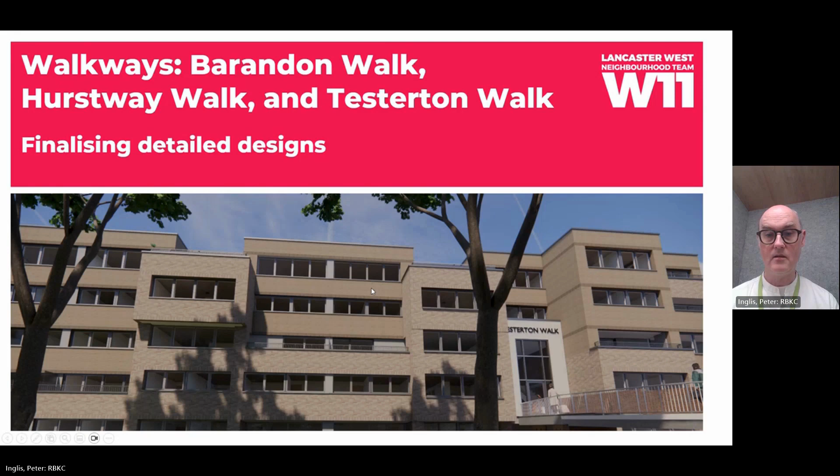So our presentation today, we're going to go through some introductions for the team, have a little recap of where we are on the timeline and on resident preferences and choices, and then our design team will take you through their finalised detailed designs. We'll talk about the next steps and the options we're asking for your feedback and choices on, and some of those choices will be individual choices for your particular flat. So it's really important that you give us these choices so that we can give you your first choice where that's possible.

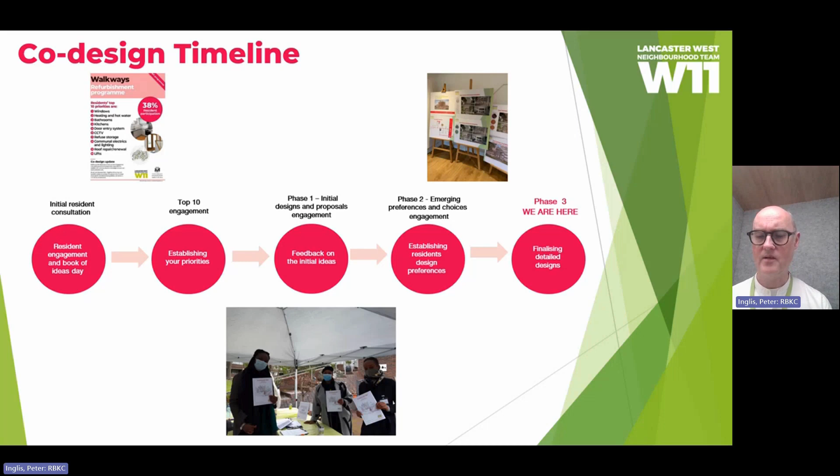So there's been a big gap between there and where we are now. But what we're doing now is building on all that advice that you gave us at that point and showing you the finalised detailed designs, where we're really getting into the detail now and seeking your expertise of living in the block to help us finalise some of those. That's really important to us to hear about.

So just to go through some of the big picture preferences that residents voted on last time out.

What was very important was that you voted for triple glazed windows. The majority of people chose triple glazed windows in the Ideal Combi Futura Plus range, which a lot of you will have seen within the pilot flats, and chose a top hung outward opening way of operating these windows, so that your blinds and curtains are not affected by opening the windows.

Vast majority voted for Ideal Combi sliding doors to the patios, so we have incorporated both of these where size allows us to do that. And looking at the finished colours, there were various colour palettes presented where you chose a white, grey and cream colour palette, which you'll see developed in the slides here. And 67% voted for maximising the external wall insulation, which is really important for reducing energy bills and also keeping you comfortable throughout the year.

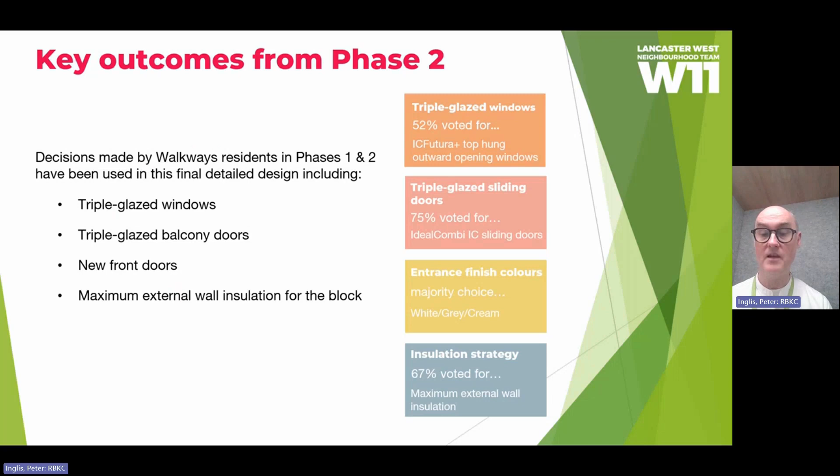That's the sliding balcony doors and the arrangement where, in flats that allow it, two windows slide to make a large opening. That's what we're offering, but from resident feedback, some people felt that arrangement didn't work for them. So we're offering an option on exactly how these windows open, which Mark will talk about in a few slides' time.

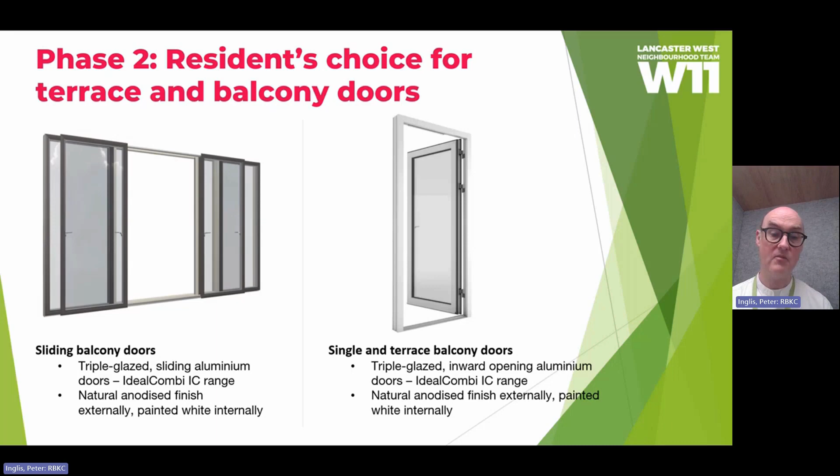Where we can't fit sliding doors, such as at the end of some balconies where there's either a single opening door or a very narrow door and panel, the doors will be inward opening, again triple glazed windows in the same range and colour.

This was a slide from phase 2, where we were looking at different ways of putting insulation onto the building. As you'll see in a minute, we've developed that strategy somewhat, but this was looking at colour palettes - white, cream and grey block facade - maximising insulation on the outside where we could.

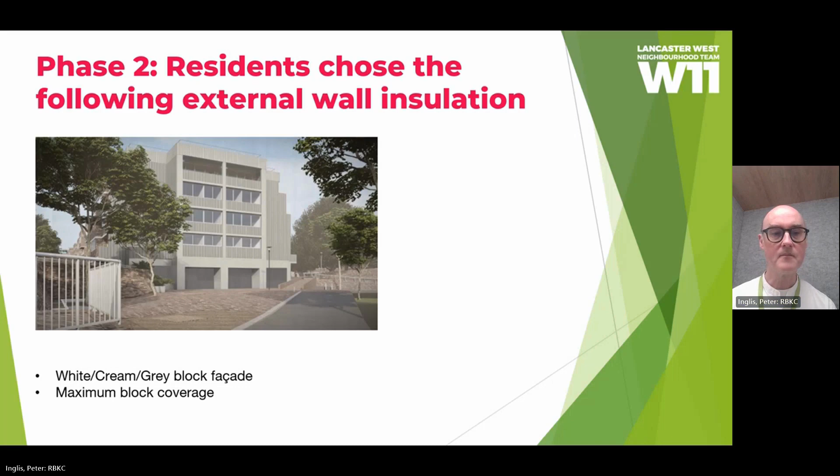So now we're into phase 3 and we're finalising the detailed design. I'm going to hand over to Mark Elton to talk through that process.

Before we get into the detail of the proposals, for the benefit of those who may not have been involved or engaged before this period, I thought it was worth going over some of the principles of low energy retrofit and the reasons why we're doing a lot of these works.

When we talk about an energy efficient strategy, it means we are applying measures to the building that ultimately aim to reduce the heating needs of those spaces, whilst at the same time improving thermal comfort for the inhabitants.

So when we talk about thermal comfort, we mean the body's ability to remain stable at a comfortable temperature within a space, without requiring excessive energy to keep warm or to keep cool.

We lose heat from our bodies in three ways. We lose it by conduction - when we touch cold surfaces, we transfer heat across to them, typically cold floors. We lose heat by convection, so when cooler air blows over our bodies it wicks heat away. Anyone who's lived in a drafty room will know the discomfort that cold drafts can bring.

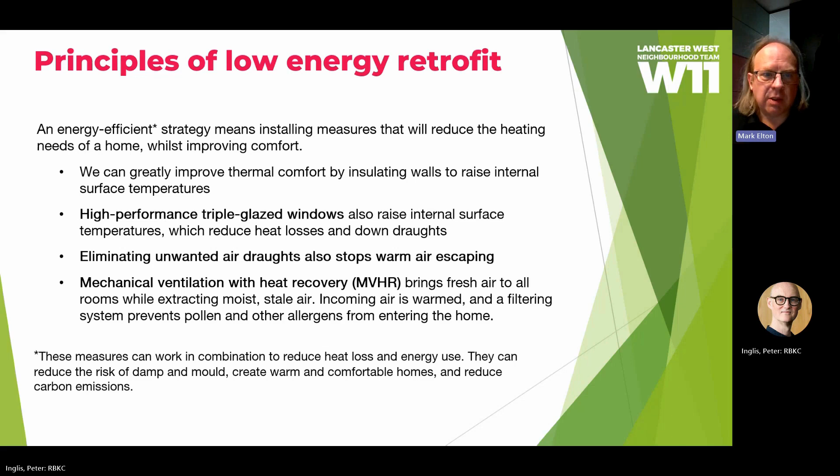So to look in detail at some of the measures being installed, external wall insulation is the biggest change that will happen. This is a system applied to the outside surface of every part of the building, so all the external walls, the soffits, and the roofs are also being done in a slightly different system. This external wall insulation has a number of components that aim to achieve the measures and improvements we were just describing.

It's made up of a parge coat, which is a mineral plaster layer that goes over the existing brickwork, and that does the job of keeping air drafts and leakage out. The main layer of this build-up is a stone wool insulation, literally made from basalt rock that has been melted and spun like candy floss and turned into insulation, trapping air pockets within its matrix.

Because it's made of rock, it literally cannot burn. It's an A1 rated material, non-combustible. The nature of that material means it prevents heat loss from inside, but it works both ways - it also stops heat from outside in the summer getting to the inside, which will help keep stable, cooler temperatures in the summer.

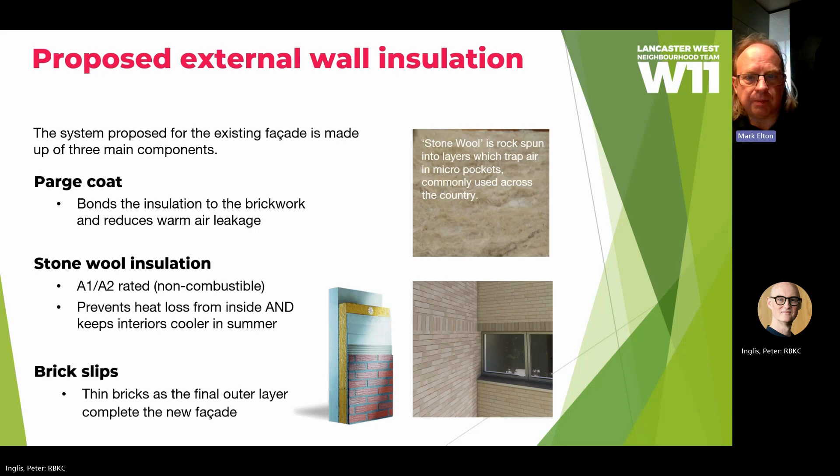The internal spaces - the corridors, the communal street, and areas where they open up to the glazed roofs - will remain unheated spaces, albeit enclosed, so there won't be wind howling through them, because entrances will be replaced with new glazing and new partitions. Nevertheless, this is an unheated space, so we don't want to lose heat into it from the flats. So insulation will be added to the interior surfaces of the flats. We don't have images of that yet - that's the next element to be worked on. It won't need to be to the same level as the external insulation, but it will be there.

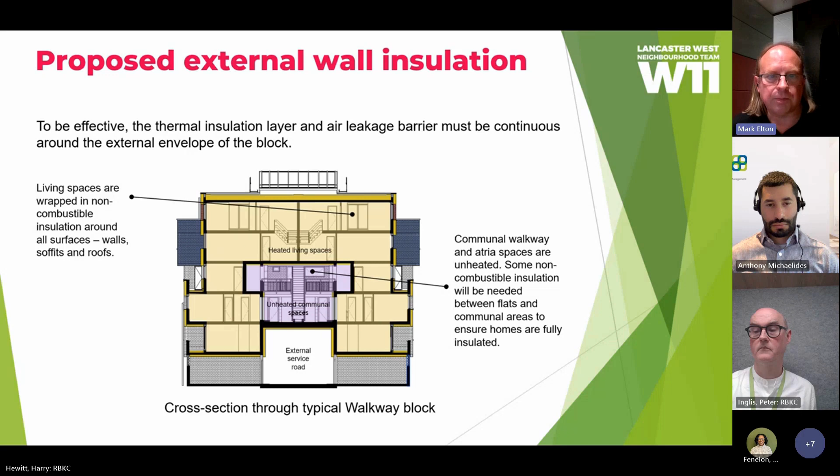And that gives us an opportunity to refurbish the inside look of the building so that it's to a similar level as the external. Next slide, please.

So how does this insulation affect the outside of the building, or in particular where your flats interface with the outside? Inevitably we are wrapping that combination of insulation and bricks across every surface. So wherever you have a window that currently goes up tight to the brickwork, when that window is replaced it will go up tight to the new brickwork, but it means there will be a small area of infill covering the end of the new insulation. This also happens at soffit level, where we're covering insulation to the underside of flats where you have a recessed area.

So it does mean that all your windows and patio doors will get marginally smaller. We're talking about small percentages here, depending on each interaction with the new insulation. We could be talking between 7 and 12%, so not a huge amount. Most of these windows are in fact oversized for the size of accommodation behind them, so it shouldn't be too detrimental.

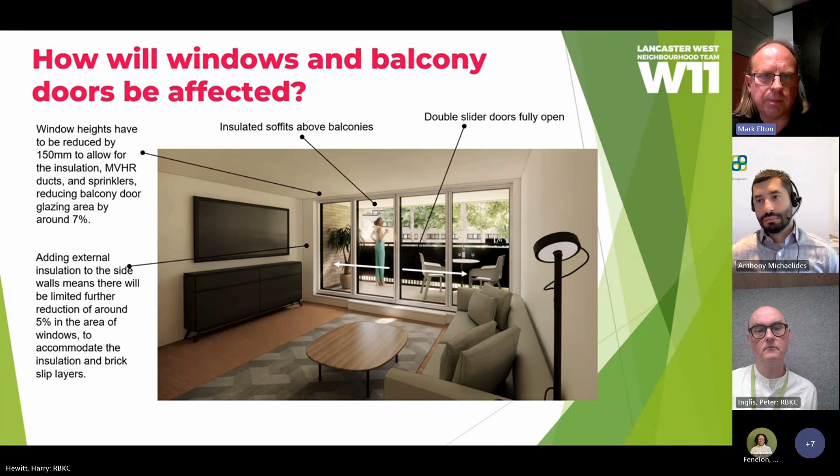If your flat has that type of window or glazed screen opening onto a balcony, this is where we are looking at a couple of options on the fenestration that's put back in. The default option will be that you have two large doors in the center that will both push out and then slide across the fixed pane to give you as wide an opening onto your balcony as possible. Those doors will lock in a sort of cracked open position so that they can open, I think it's less than 100 mil width, and can be locked into position so you're getting some ventilation overnight perhaps, but without losing any security.

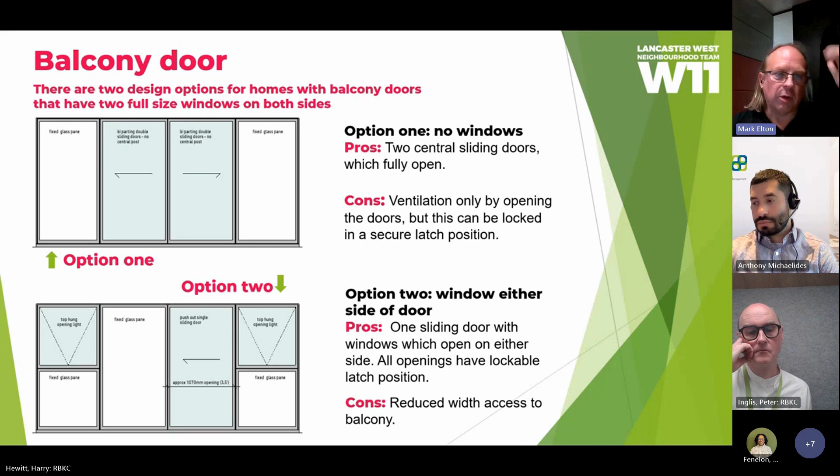For those who might want a different option, to have opening windows as well as a sliding door, option 2 shows how that might work: you get two opening windows on the outer side of the glazed ensemble, and then just one single push-out door that slides in front of the fixed pane. It's technically not possible to have a sliding door that slides in front of an opening window because of things like handles and the runners that the slider has to fix against. So these are the two options you will be invited to comment on in the surveys.

Some of you may have a similar but slightly different arrangement whereby you have a low brick wall over part of that fenestration opening onto a balcony. In that scenario we're not intending to remove the brick wall; we will look to improve its thermal performance by adding insulation to the outside. But you will get the window elements replaced, and again the push-out single sliding door. You may instead have a fixed glazed element in that zone, in which case one of the previous option 1 or option 2 would be applicable.

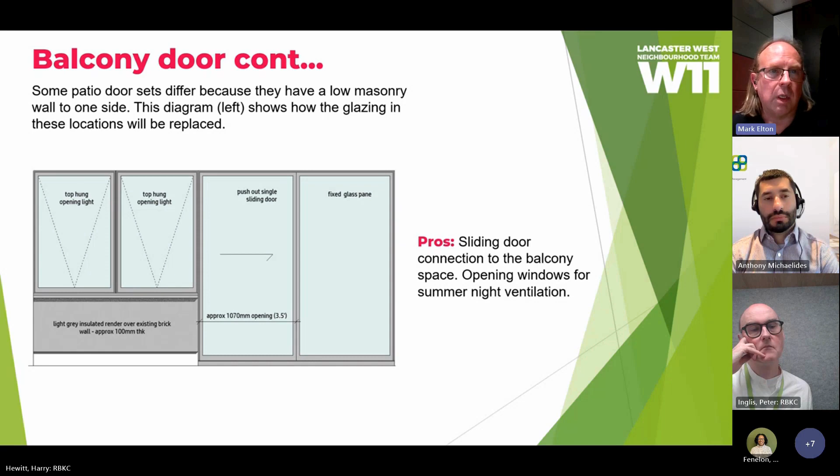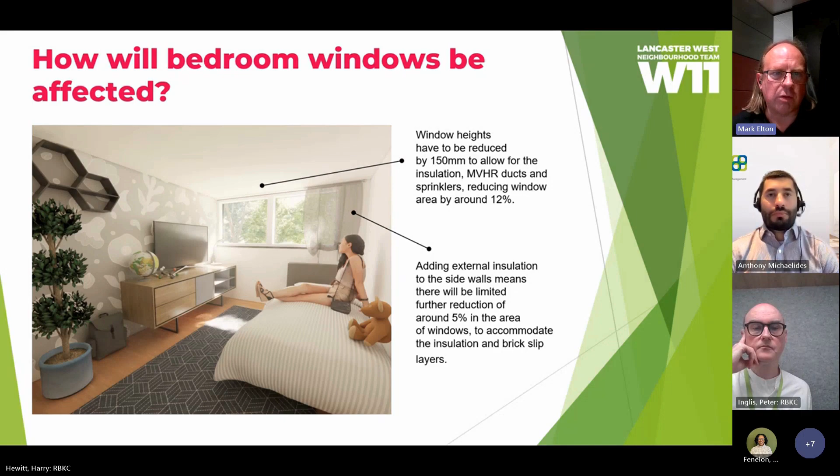I'll come to, you'll see an image later, but in some areas where the outside face of the brick parapet forming that balcony clashes with the proposed insulation, brickwork around the corner, we are looking to remove brickwork facing to the parapet and replace it with a new metal balustrade. You'll see that in some of the images later. In those flat types, it means the balcony width will increase to offset the reduction in the end areas where the new insulation is intended to be put in.

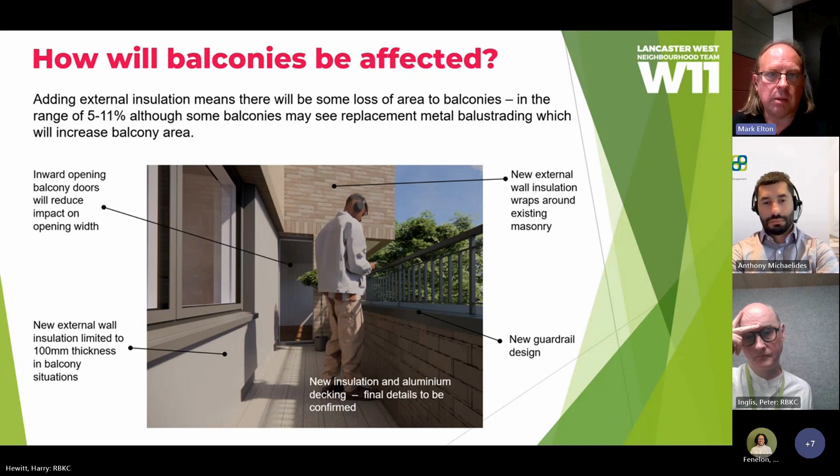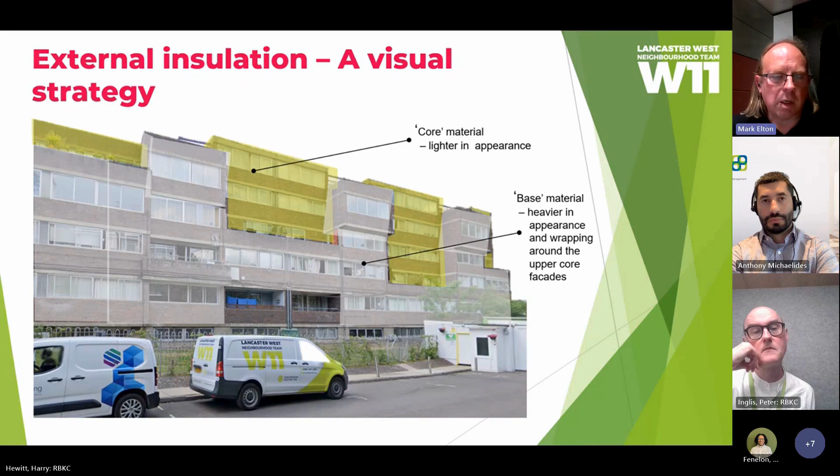So you have a darker buff grey brick to the base areas, and then a more cream coloured brick to the upper areas. Where there are some grey panels at the moment, infilling between adjacent windows across the ends of party walls, we are looking to finish those areas with a light grey render finish that will in some ways mimic what's there at the moment. That will allow us to have a lesser impact on widths at the back of balconies as well.

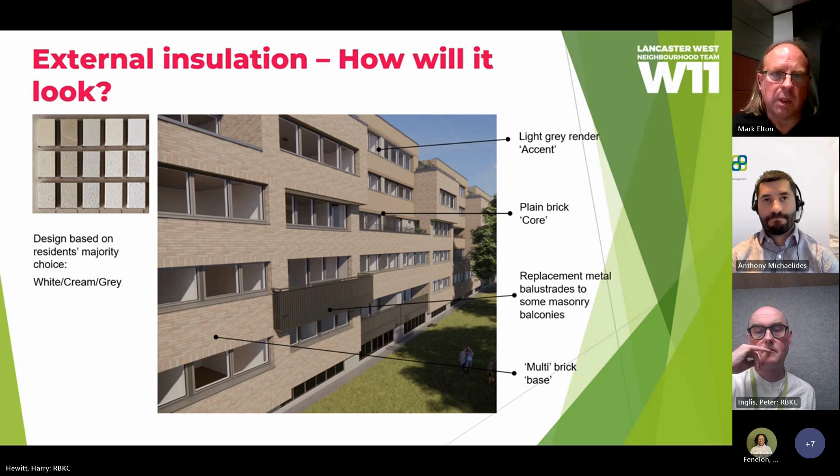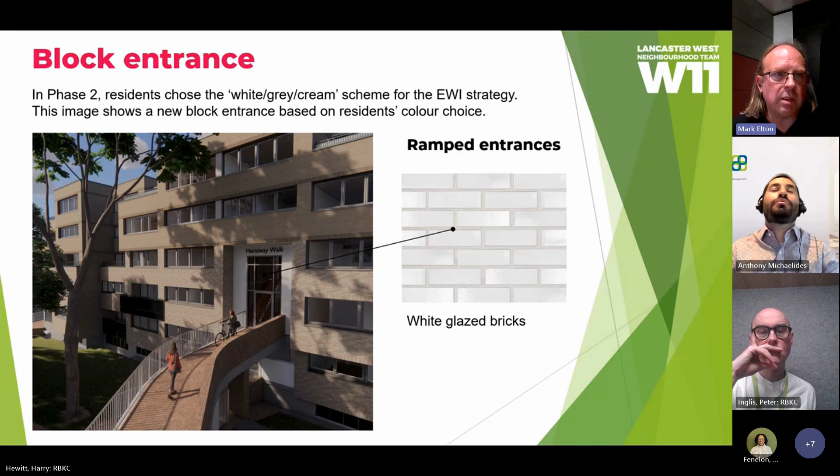These are the courtyard entrances, which are less for visitors and more for residents to access the garden. Currently these are not very attractive spaces. They get used for rubbish collection by dropping bags off of the balconies, and they tend to be where a lot of external services have been applied over the years. So we're looking to tidy all of those up, take services up to roof level or more discreet areas, replace the security on those, and enclose the staircases.

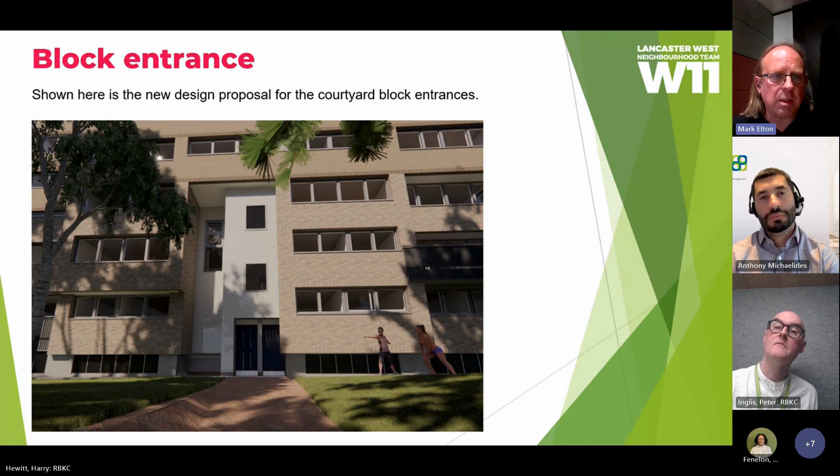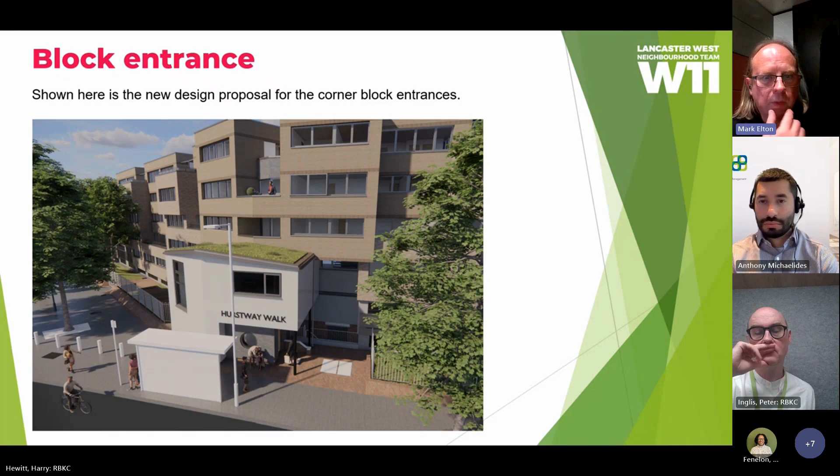So we are looking at several opportunities to improve secure cycle storage facilities. That's integrated into this entrance design, again with the white glazed brick theme and a planted roof in this case. Next slide, please.

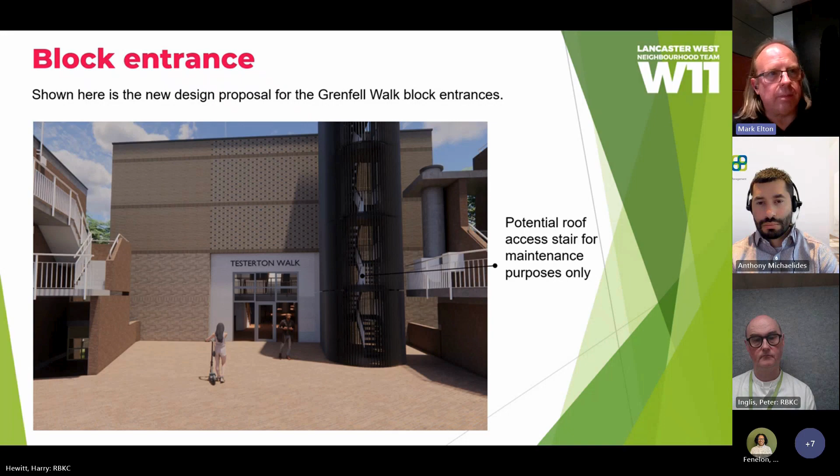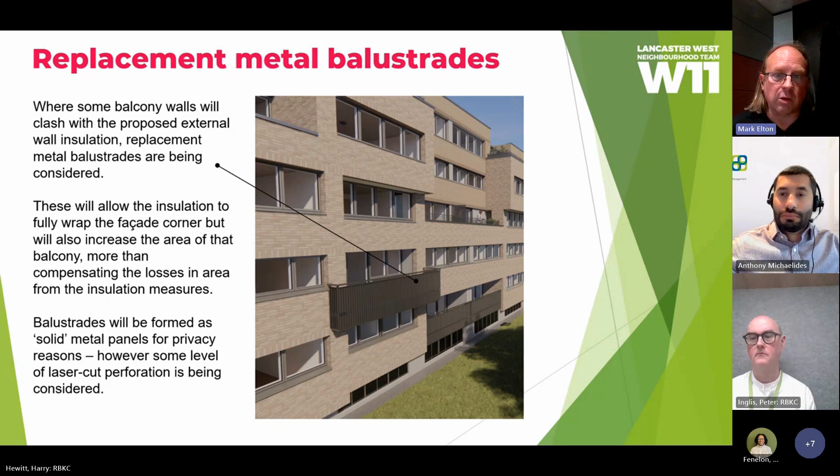So the new balustrades - there are some areas where the existing masonry walls to the balconies clash with the masonry walls to the flats themselves, meaning there'd be a large area with no insulation in those cases. That's where we have looked at an option to remove the masonry to allow the insulation to fully wrap around the corners of those flats, and replace it with a metal balustrade with vertical fins on the outside and a perforated solid panel on the inside. That will also have the added effect of gaining a little bit more space back on those balcony types.

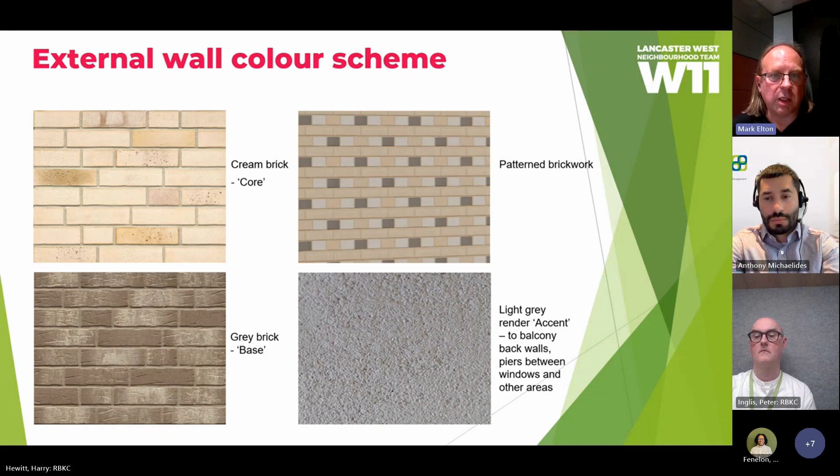Here are some close-ups of the proposed bricks. You can see the grey buff base brick, bottom left, the cream brick to the upper levels. We have some areas, particularly on the Testerton Walk ends, where we're looking at introducing a pattern brickwork style, and some areas with light grey render. These will be put onto samples initially available in baseline, but we're looking to have more samples available throughout the site.

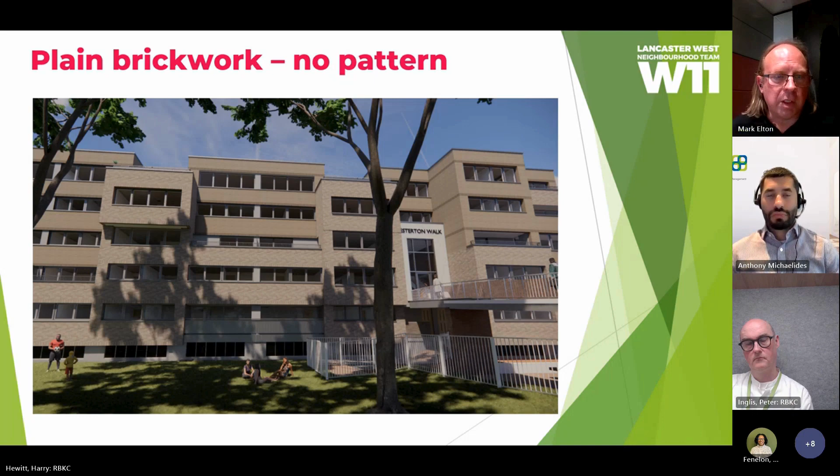Next will be another view of this same option from a different angle. Here you see at the Whitchurch Road end, the cream brick becomes more prominent at this end as that building shape changes.

This is a view from another block at the other end. So what won't change is that the existing brickwork is staying red. The areas of landscaping, etc., will stay as they are at the moment, but it's the living accommodation that will receive the insulated new brick finishes.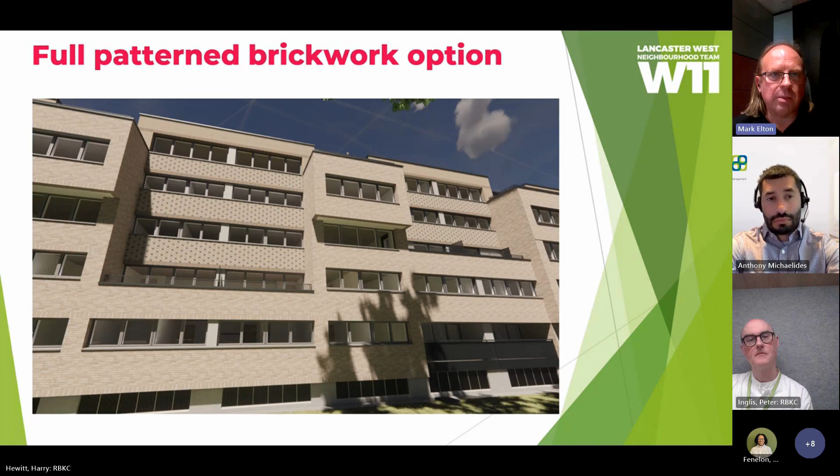So part of the questionnaire is, if you have any preferences about the extent of that pattern brickwork, to make your views clear on that. There's a couple of different views of how that pattern brickwork would extend across the scheme.

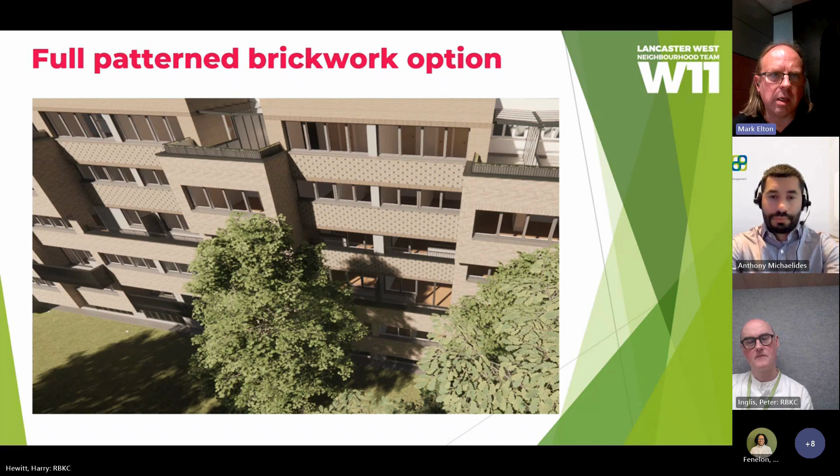So these are where the roof works interface with the external wall insulation works, and there are a number of issues around these terrace areas that are being discussed at the moment. I'm going to hand over to Peter to talk more about those particular issues related to these areas.

So for residents on the top floor who have these balcony terraces, we're going to be replacing the terraces with non-flammable metal pergolas, and it's a design we're still working through at the moment. What you're looking at here are not finished designs - we've done some pilot studies on one of our flats in Testerton Walk to trial this, but they're not finished by any means. We're looking for residents' comments on the designs, but also what we're looking to offer, if at all we can, is individual residents' choice on how they're finished for their individual flats.

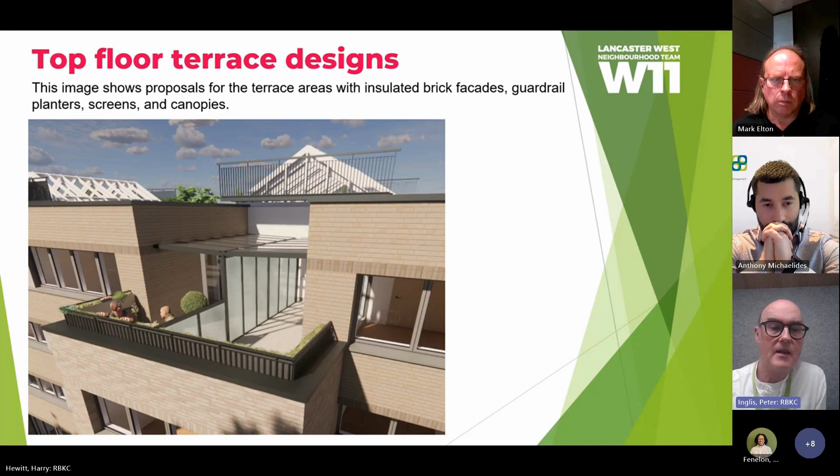So if you look at the next slide, this is a first option we're looking at, and there are some difficulties with this we're working through at the moment to do with weight and cleaning. The first option we'd like to offer is to have a glazed canopy on top of the pergola, so that it's keeping the rain out of the terrace. If this is something you'd like and we can manage to make it technically work, this is something we'd like to offer to tenants who want a finish like this.

We're saying at the moment this is for secure tenants only. We're looking at ways to extend this offer to leaseholders, but that's something we're working through at the moment to understand, working with home ownership about how these might be charged if leaseholders wanted to upgrade essentially to a glazed canopy. So if we can, we'll offer that, but we can discuss that further with individual leaseholders.

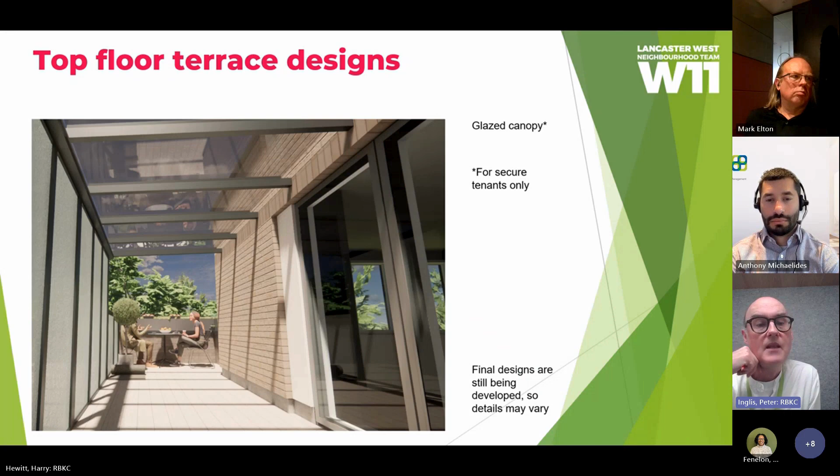The next option is another view of that glazed canopy, looking back towards the atrium roof lights.

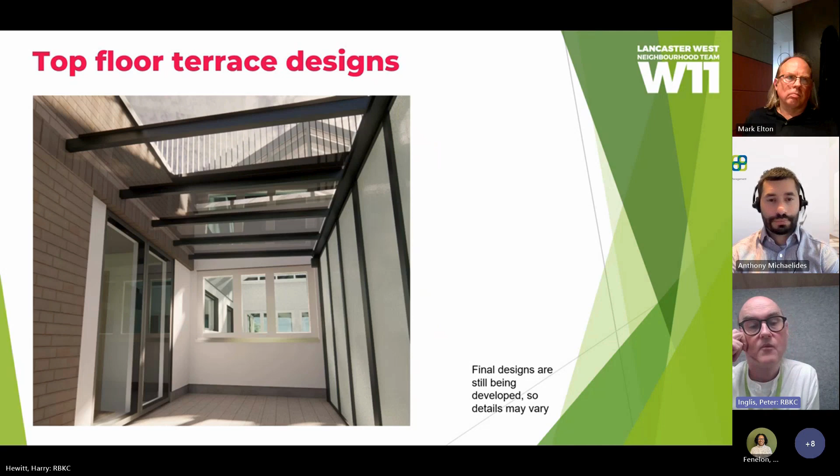And the next slide is an option of a trellis, and this is one where it's open to the sky, so the rain would come in, but this would make the terrace more airy. It's open to the air above, and this has brise soleil on it, which are metal fins that will help with sun shading. So although it's open and you can see the sky, it'll help take the sun off the terraces.

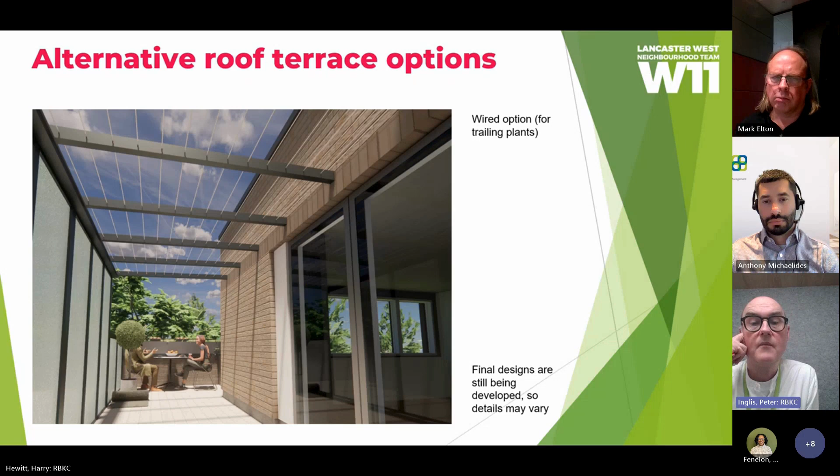And a third option would be for stainless steel wires between the metal structure of the pergola, and this is for people who might want to grow trailing plants along their terrace.

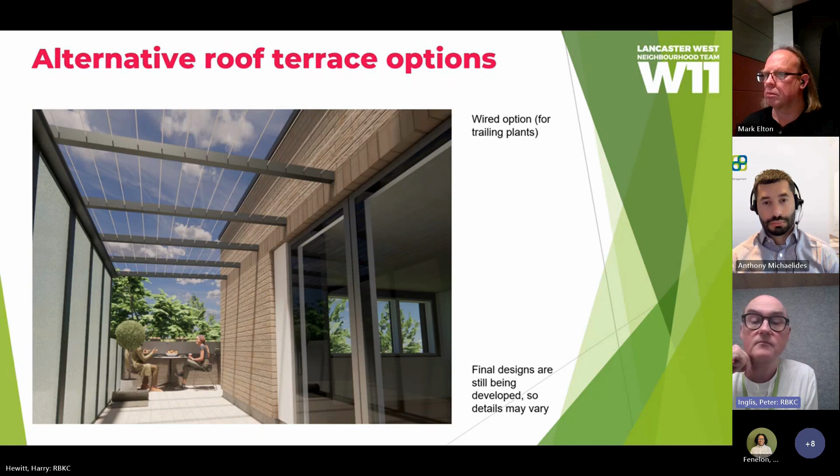So these are the three options we're asking about - if we can make these options work technically, which would be your preference? Our intention would be to offer residents their particular choice on their particular terrace. So your neighbour could choose a glazed roof, and you could choose this wired option for trailing plants if you so wished.

The other thing we're asking for your comments on is waste strategy. Now, we know from previous consultations that many residents have valued bin chutes, but we also know that some residents have found the operation of them problematic. If at all we can keep them, we're looking technically at whether we can - we would need to enclose them into enclosed rooms within the staircases. We're also discussing with the Grenfell Memorial team the practicalities of continuing to wheel the bins out at the back end of the site.

The planning officers also have a view on refuse strategy. But so we can get a complete picture, we would like to get your thoughts on whether having bin chutes is something you'd value, or whether you would prefer for upgraded bins to be external to the building. We know there are pros and cons to both, but we want to get your views.

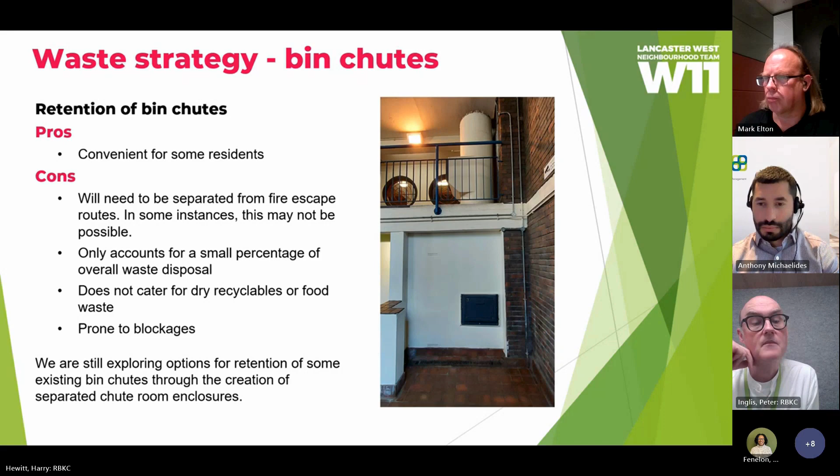This slide shows that if we look at putting bins outside - and there will be some, because recycling bins can't be incorporated into the current bin chutes - we're looking to enclose them into much neater, tidier enclosures on the outside of the building. As is the case at the moment, for those who physically can't take their bins outside, W11 will look to make individual arrangements with those residents to collect your waste.

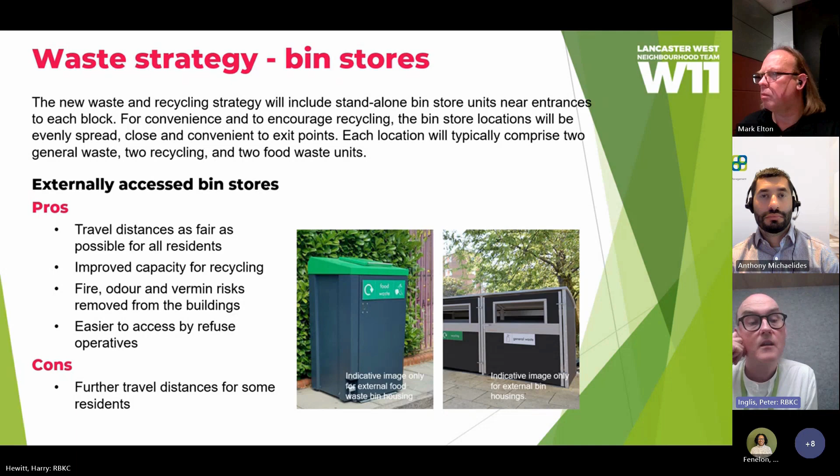Next. Sorry, Peter, before we go on to the next steps, there's some comments in the chat. Could we just address those before we go any further? Okay.

I can see that Simhar on the chat is politely disagreeing with Mark. The external wall insulation wraps, you would be losing the historic architecture of the blocks, changing the whole walkway's interior with cheap modern brick slips. This is a waste of money and labour. Why not respect the 1960-70 heritage look with cleaning and repointing existing brickwork? We've seen successful refurbishments such as Coal Drops Yard in King's Cross by modernising the heritage look without covering it up. For me, the new external wall options make it look like a cheap housing block, which will decrease the property valuation. Just like the proposed looks, designers have got it wrong with exterior solutions, and cream will dirty over the years, and a mismatched set of bricks on site. I'm not convinced either with the walkways and common areas.

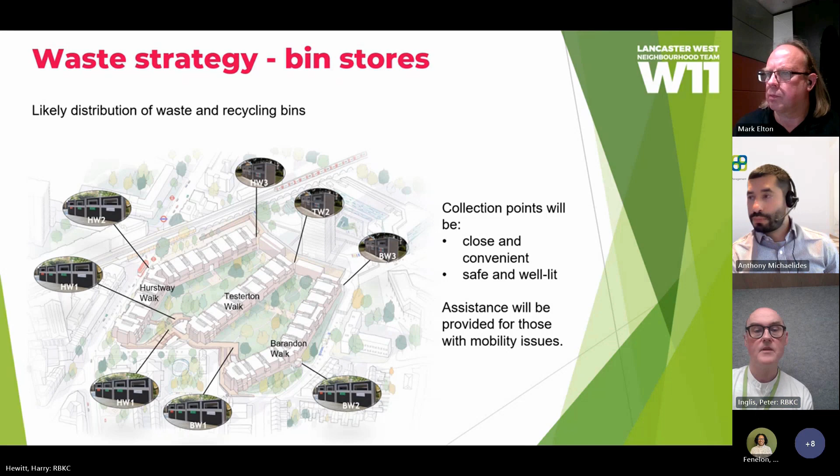Shall we continue to next steps? Thanks, Peter. So, next steps.

Following this presentation today and the sessions that took place previously, residents are going to be asked to give their feedback and preferences on their external finishes. The intention is for LWNT to collate this information and share it with us at Capital and the architects, and then it'll be included in the proposed designs for planning.

In the meantime, we're engaging with the planners regarding the planning pre-application about the proposed scheme, to obtain initial feedback from them. Then the full planning application can commence, and we plan to have this submitted within the early part of July.

So, appointment of a stage 1 contractor to work with the design team on detailed design proposals. The intention here is to work collaboratively with the contractor to develop the detailed designs, and this will enable some clarity from all parties when it comes to undertaking the works, but also on site, and provide some clarity in terms of cost certainty.

Finally, the intention is to carry out some pilot installations to roof level units. This will give us the opportunity to test out the installation of the windows, the terrace doors, and the external wall finishes as well. Next slide.